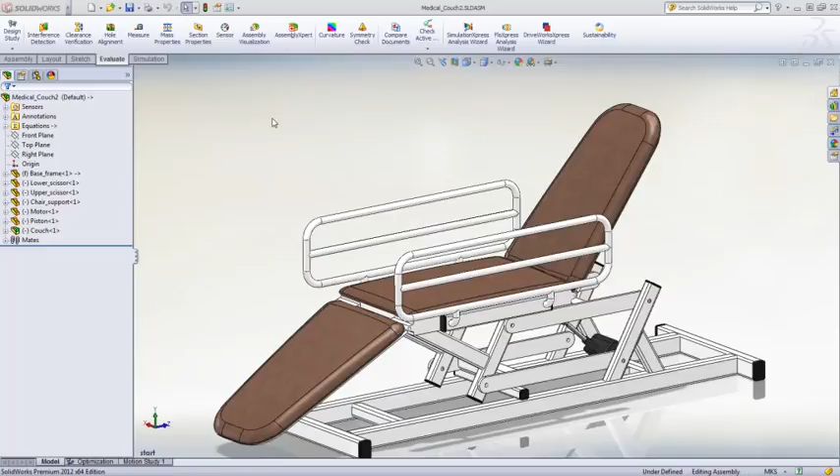New for 2012 in Motion is the support for sensors and simulation parameters. Sensors can provide a lot of valuable information. They can automatically alert us if motor torque exceeds a certain value or if joint loads are exceeding bearing limits. But we can also use sensors and motion to refine our design very efficiently.

Let's take a look at this medical examination couch, where we need a certain range of travel, but at the same time we want to minimize the actuator size needed to raise and lower the bed. In the motion study, we have results to monitor the height as well as the actuator force.

Creating sensors is really straightforward. From any result in motion, you can just check the option to create a sensor and choose what it's going to monitor. There is even an additional option to select just a specific time in the motion study.

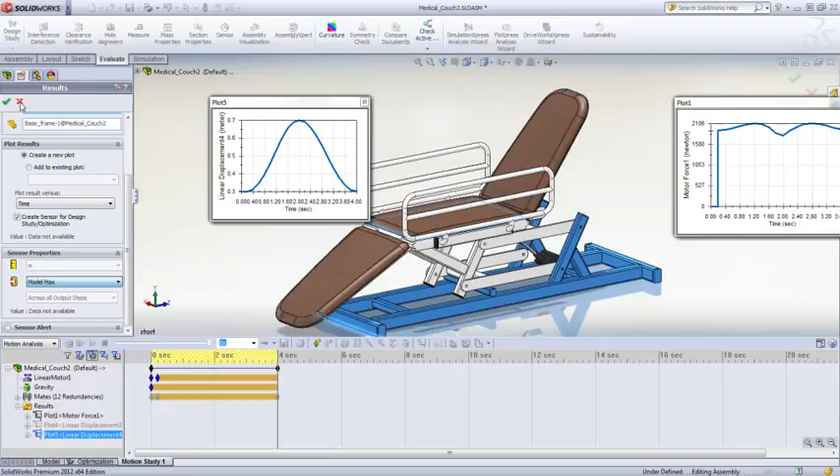In our design study, we have selected geometry dimensions to vary for the length and height of the scissor mechanism, as well as the mounting position of the actuator. We can use the sensors to track if the design scenario meets our height requirements and also optimize the design to minimize the actuator force.

It only takes a couple of minutes to solve, and then we can readily review any design iterations. Green is our optimal solution, and red are iterations that don't meet our requirements. One of the great features when using motion in design studies is being able to review the mechanism movement for any of the iterations that have been run.

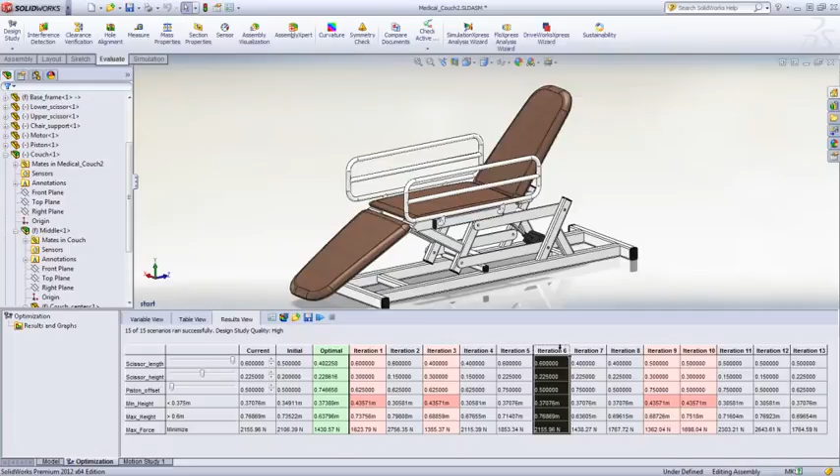This provides great insight into the mechanism performance and aids in selection of the best design configuration. We can also go to the motion study and see the motion results in more detail for the current iteration. So motion support for sensors makes optimizing mechanism layout incredibly quick and simple.

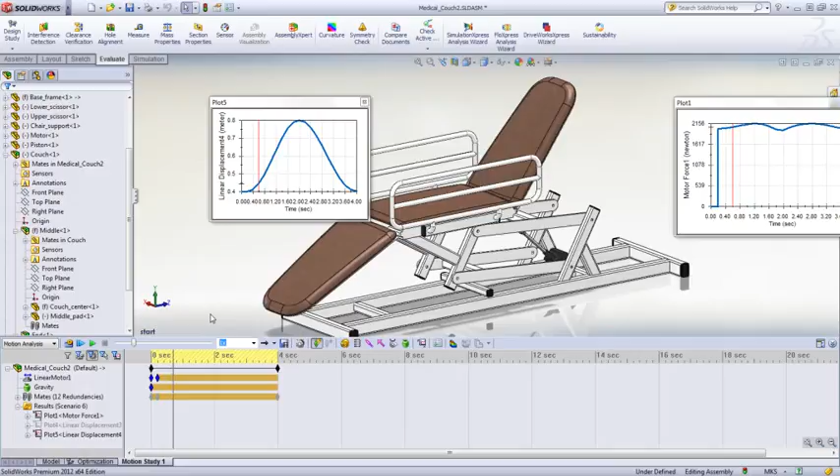Let's take a more in-depth look at design studies using a simple example, shooting a basketball through a hoop. Now for a given launch angle, it would be great to know at exactly what speed we need to release the ball. And we could use a manual trial and error approach to find the speed, but why not let the computer solve it for us? This is where design studies really take the effort out of analysis.

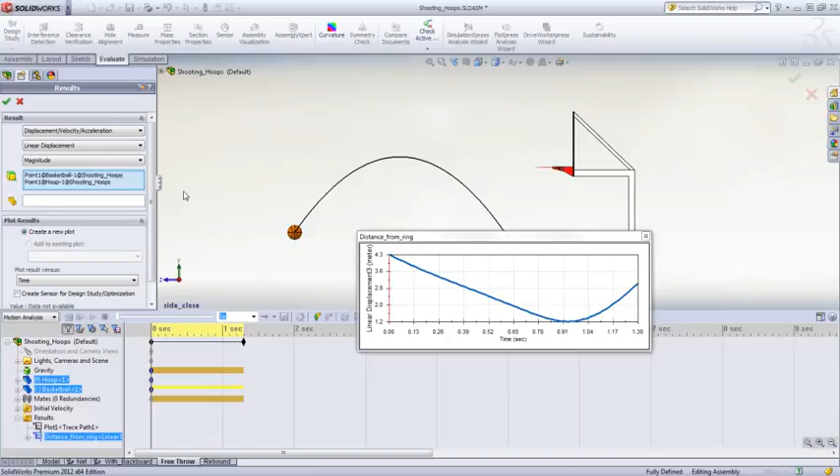In this model, we want to minimize the distance to get the ball as close to the center of the hoop as possible. So we measure the distance from the center of the ball to the center of the hoop. If you have Simulation Professional, you can directly optimize the solution as we saw with the medical couch. If you just have SolidWorks Premium, then we can run a range of values and then manually pick which one best meets our needs, which we're going to do here.

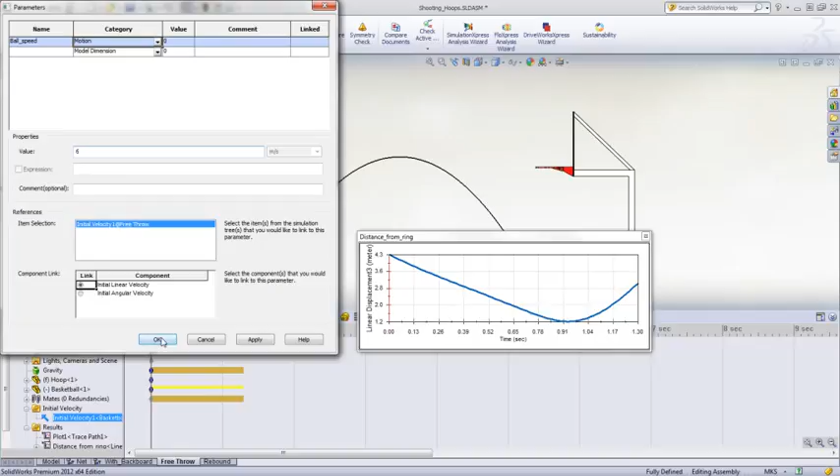It's easy to incorporate motion characteristics into design study parameters as well. We just pick the entity from the particular motion study and we're provided with the properties to control for that object. In this instance, we're controlling the initial velocity and want to start with a value of 6 meters per second. In the study variables, we specify the velocity range to evaluate, in this case from 6 up to 8 meters a second at 0.25 intervals.

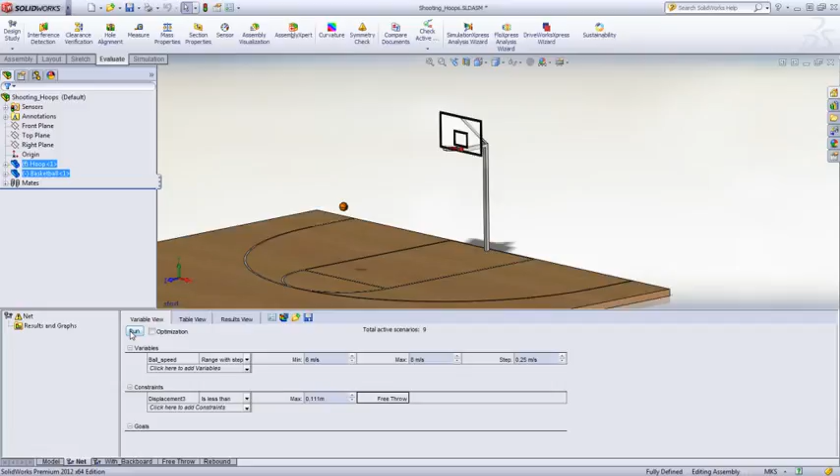Since the ball is smaller than the hoop, we need to account for that possible gap between the ball and the center of the ring. So solutions where the distance is less than 111 millimeters are acceptable. We click on Run, and very quickly we can see which speeds meet our goals.

As we saw with the medical couch, we can click on any of the iterations and review the motion. Going to a side view clearly shows the path the ball takes. As the ball speed increases, we finally find a valid solution at 7.25 meters a second.

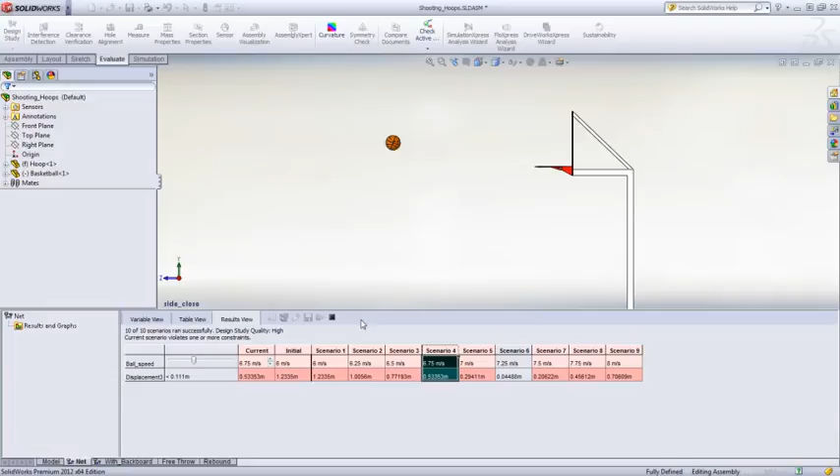If we were to optimize the solution, it would find the exact speed at which a solution gives us closest to zero distance. We can also go back to our motion study at any time and take advantage of the additional review capabilities, like trace curves.

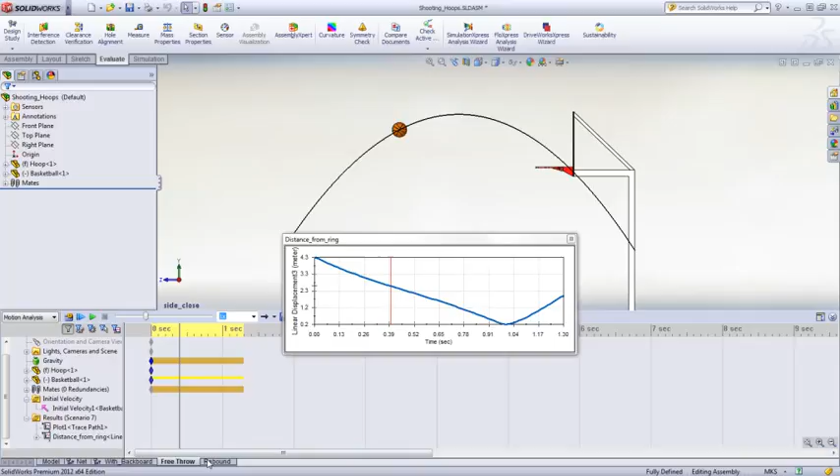Now for those basketball fanatics out there, you're probably saying there's a better chance of rebounding the ball off the backboard into the hoop. Well, we can check that as well. We just create a duplicate study and add contact between the ball and the other objects.

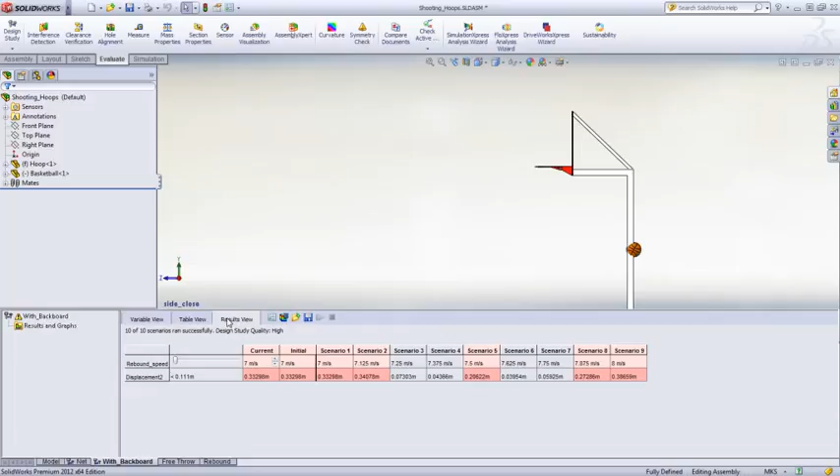For the design study, it's an identical approach, but you'll notice that we narrow down the search to only between 7 and 8 meters a second based on the first run results. And you also notice that it's linked to the new motion study. When we go to the results, again we have great visualization. On the first iteration, the ball just clips the ring and doesn't go in.

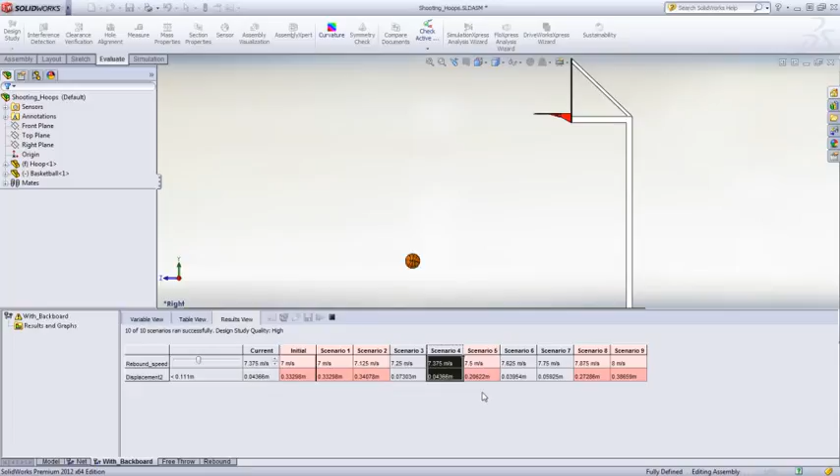As we increase ball speed, we find several valid solutions, however. There are now 2 successful iterations where the ball goes straight into the ring. The next iteration fails with the ball bouncing off the back of the ring, which is something I do most of the time. And then a further 2 successful baskets when the ball rebounds off the backboard.

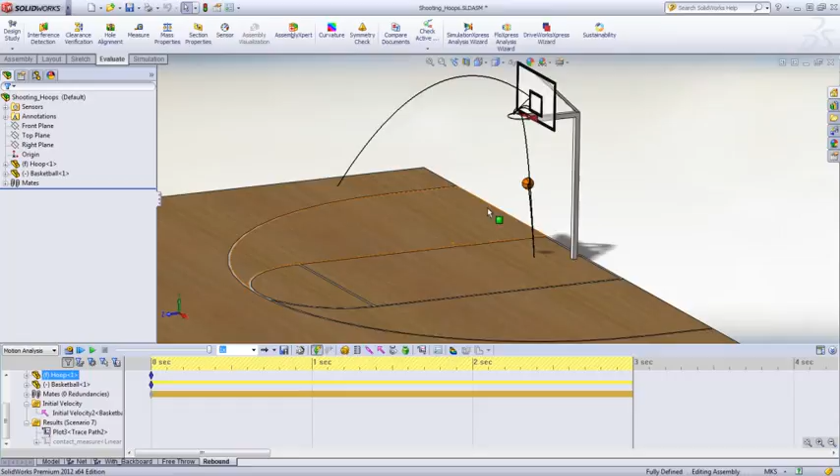With little effort, designs can be quickly improved with the sensor and design study support in motion.